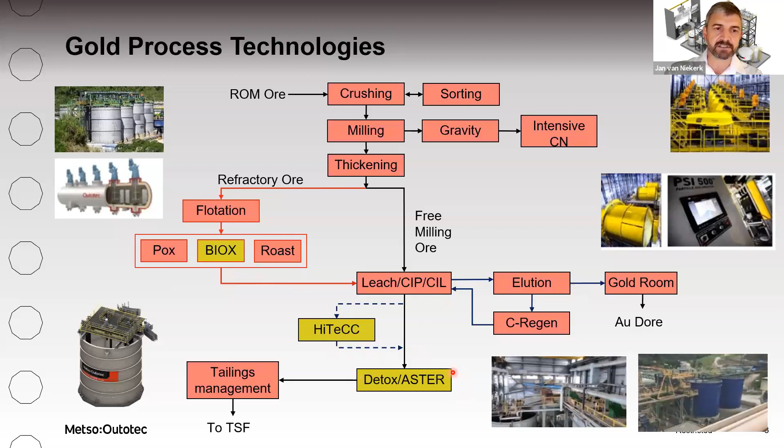Just to put the process into perspective, where it fits into the typical gold flow sheet, this shows the typical steps during the processing of a gold ore. You'll have crushing, milling, and thickening, with or without ore sorting and gravity concentration. After thickening, a free milling ore will go directly to the leaching circuit, followed by gold recovery. But for a refractory ore body, you'll normally have flotation and then an oxidation process, which is typically either pressure oxidation, roasting, or bioxidation, the topic for today's talk. The BIOX product will then go to the standard leaching section for gold recovery. The HiTeCC process we'll discuss later — it's treating the CIL tails to mitigate preg-robbing, and the ASTER process is a detox technology for cyanide destruction.

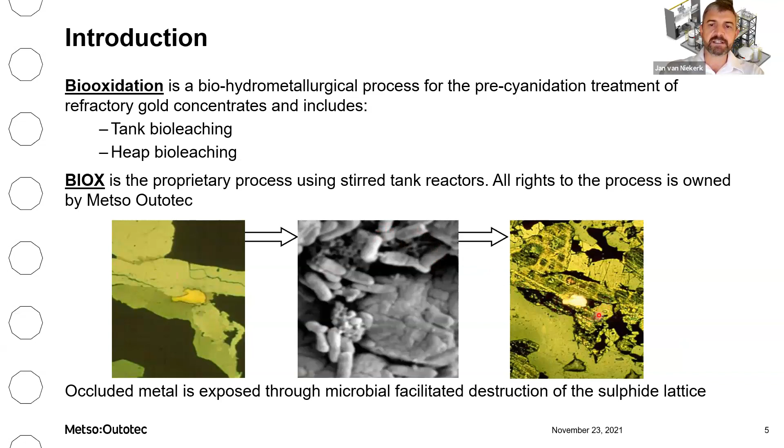Bioxidation is a biohydrometallurgical process for the pre-cyanidation treatment of refractory gold concentrates and includes tank leaching and heap leaching. The BIOX process is the proprietary process using stirred tank reactors, and all rights to this process are owned by Metso Outotec. As you can see in the first picture, the gold particle is totally occluded within the sulphide matrix. The BIOX process is then used to liberate this particle and expose it to cyanide for subsequent gold recovery.

The technology has been commercially available for over 30 years. In that time, we've commissioned 13 BIOX plants in 7 countries, with 1 new plant currently under construction. Total gold production from BIOX over the years has been over 30 million ounces.

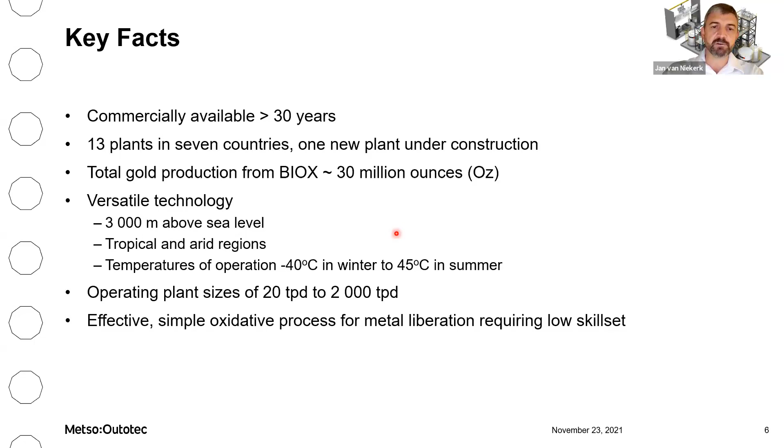It is quite a versatile technology in that it can be used at high altitudes. The highest BIOX plant currently is the Coricancha plant at over 3,000 meters above sea level. It can be used in tropical and arid regions, and it can operate in temperatures from -40 to +45. Operating plant sizes range from 20 ton per day up to 2,000 ton per day. And it's really a simple and effective oxidation process for metal liberation, requiring a relatively low skill set.

This shows the typical flow sheet for the BIOX process. The heart of the process is the BIOX reactors. We normally use a 3-3 or 4-4 configuration, meaning you've got 4 primary reactors in parallel, overflowing into 4 secondary reactors in series. Typical retention time in the BIOX process is between 4 and 6 days.

Nutrients in the form of a fertilizer type, nitrogen, potassium, and phosphorus is added to the feed to the BIOX process, as well as dilution water to feed the process at 20% solids. The important engineering requirements during the BIOX process is the cooling of the process, and we do this using internal cooling coils as well as evaporative cooling towers, and the supply of low pressure air to supply oxygen for the oxidation process. The process will normally operate at 40 degrees Celsius.

The materials of construction for the BIOX reactors is typically stainless steel, although mild steel rubber-lined reactors can also be used.

During the BIOX process, the iron, sulfur, and arsenic is solubilized during the oxidation of the sulphide minerals. So following BIOX, a 3-stage CCD circuit is used to wash the BIOX product and ensure that you've got a clean oxidized solid slurry that is then fed to a standard CIL circuit.

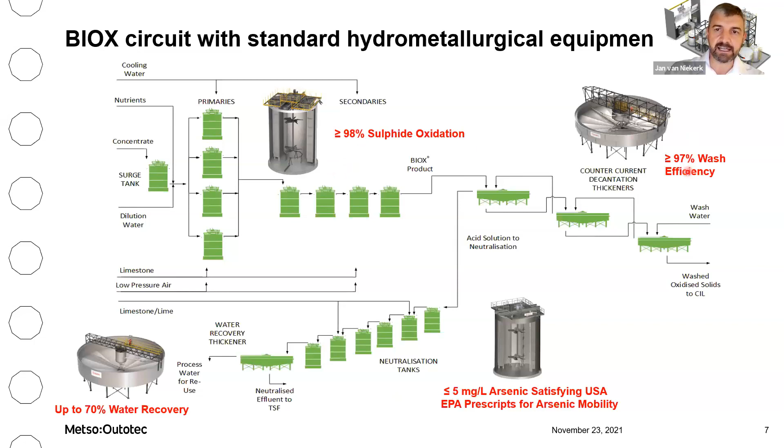The dissolved iron, arsenic, and sulfur that is now in an acidic solution is neutralized in a 2-stage process using limestone and lime to produce stable ferric arsenate precipitates that can be deposited onto a tailings dam. As you can see, the process is simple and uses standard equipment, atmospheric reactors and thickeners for the process.

The 3 important oxidation reactions for pyrite, arsenopyrite, and pyrrhotite is shown here. Important to note is the high oxygen demand during the oxidation of sulphide minerals. It's also important to note that pyrite oxidation produces acid, while arsenopyrite and pyrrhotite oxidation consumes acid.

And this, along with the carbonate content in the concentrate, will determine whether the process is net acid consuming or net acid producing during bioxidation.

This picture at the bottom shows the typical leaching mechanism during bioxidation. The bacteria do not actually oxidize the metal sulfide directly, but the bacteria will just regenerate the ferric that is the oxidant for the leaching of the metal sulfide. You'll typically have two types of bacteria in your tank, your iron oxidizers and your sulfur oxidizers.

Elemental sulfur is oxidized all the way to sulfate. It is important to note that you will always also need a small amount of carbon in the form of CO2 for biomass production during bioxidation. This is normally supplied through the solution of carbonate minerals in the concentrate.

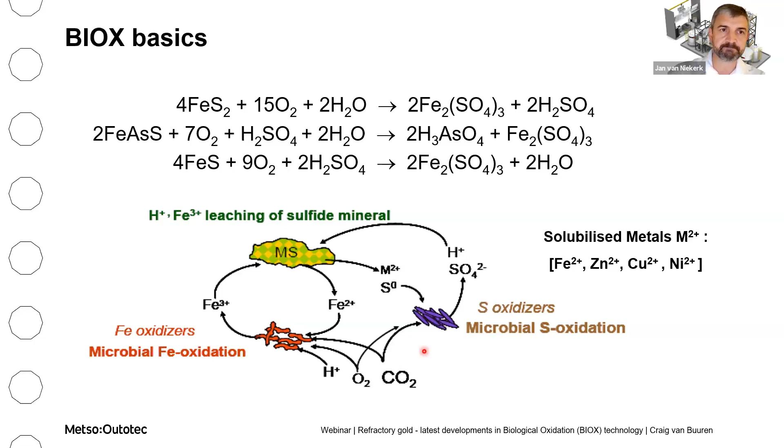Other important reactions during bioxidation is ferrous and elemental sulfur oxidation. Ferrous is for the regeneration of the ferric, that's the oxidizing agent, and elemental sulfur to produce sulfuric acid. As you can see, the reactions for the oxidation of copper sulfide minerals is fairly similar to the standard pyrite and arsenopyrite. And that's why the process can also be used for copper sulfide oxidation.

There's a few general precipitation reactions that will also take place either in the BIOX reactors or following BIOX during the neutralization step. The most important one being the precipitation of arsenic in the form of ferric arsenate, as well as the precipitation of iron and the remaining sulfates as the basic metal sulfate and gypsum.

The most important process requirements during bioxidation is to maintain a steady temperature in the BIOX process, to control the pH, and to ensure a steady oxygen supply for the oxidation reactions. The BIOX bacteria can operate in a range of 30 to 45 degrees. However, we normally control the process within a very narrow range of 40 to 42 degrees.

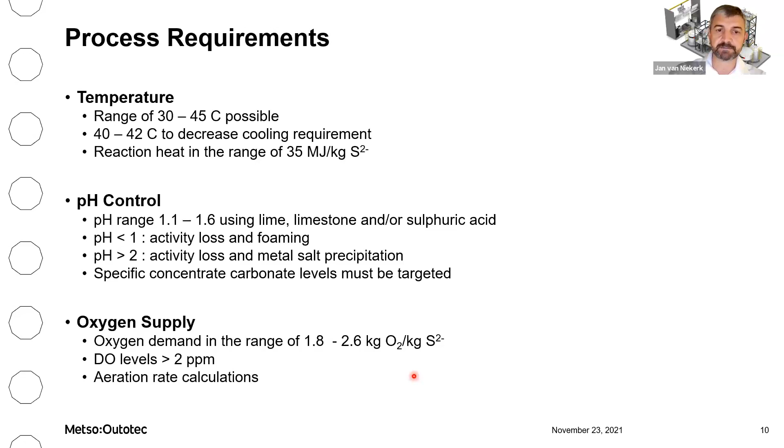Another important aspect of bioxidation is the fixation of arsenic following bioxidation to ensure that they have environmentally compliant products. We use a two-stage neutralization process using limestone and lime to produce ferric arsenate as the arsenic precipitate. This has been shown to be a stable form of arsenic and conforms to the US EPA standards for the disposal of arsenic-bearing material.

Typical results from neutralization tests during bioxidation is shown in the table, and as you can see, the solution concentration of both iron and arsenic following neutralization is well below the standard, as well as the TCLP, or toxicity characteristic leaching procedure extract, following treatment of the precipitate.

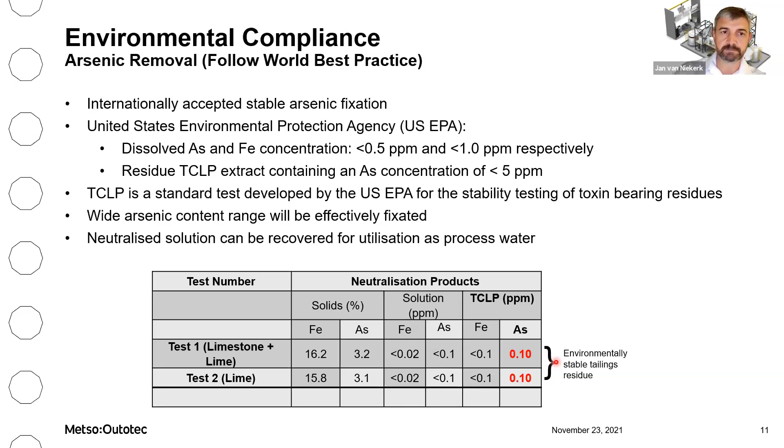The BIOX culture consists of a mixed population of a large number of microorganisms. These are all naturally occurring bacteria and can be found anywhere where you have acid mine drainage. We have just taken those bacteria and trained them up a bit to be able to operate at higher solids concentrations as well as higher temperatures, giving you faster reaction kinetics. We do not actually control the population of the bacteria, but we allow it to reach its natural equilibrium, and the dominant species will be determined by the process conditions as well as the concentrate characteristics.

Interesting to note the concentration of bacterial cells per milliliter, and for a healthy population, the concentrations will be in the order of 10 to the 8 cells per milliliter. The bacteria are present as both free-floating as well as attached to the sulphides in the slurry.

It's important also to note that the bacteria are non-pathogenic, and therefore it does not pose a risk to humans or animals. But it must be noted that the slurry itself contains dissolved iron, arsenic, and sulfur at a very low pH, so the slurry itself is toxic for humans.

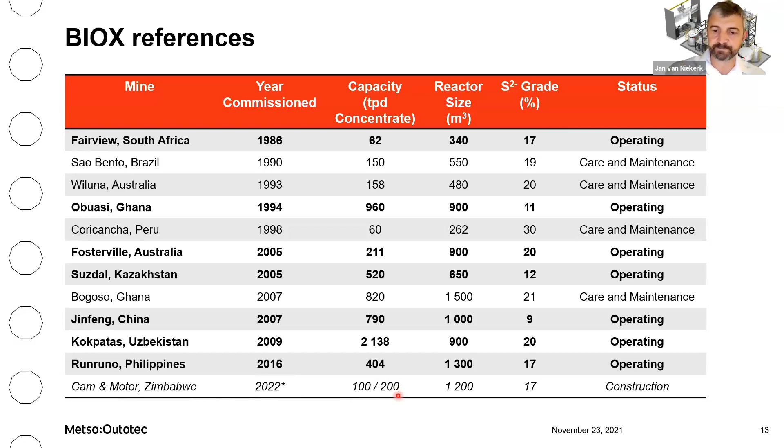As I said, the technology was initially developed at the Fairview BIOX plant in South Africa. This was an old Edwards roaster that needed to be replaced, and the mine was owned by the Gencor company in South Africa at the time. They evaluated quite a few different technologies at the time, and finally decided to develop the BIOX process due to the lower capital cost associated with the process. They didn't want to use roasting again due to the presence of arsenic in the concentrate, and the plant was too small for an autoclave.

The plant is still in operation today, and gold recoveries on this plant typically is in the order of 98 to 99% following bioxidation.

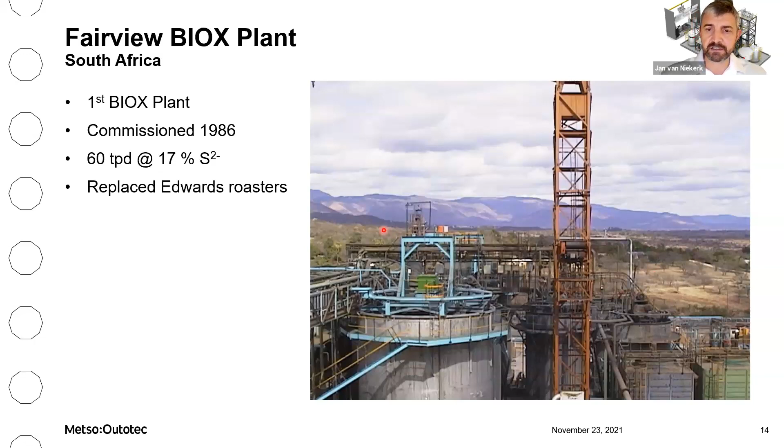As I said, the largest BIOX plant in operation is the Kokpatas plant in Uzbekistan. The first phase was commissioned in 2009 and the second phase in 2011. The plant demonstrates the ability to increase the capacity through the use of modules. The plant consists of 4 modules of 6 reactors per phase.

The Kokpatas plant will also see temperatures of plus 50 in the summertime and needs to operate at minus 20 degrees during wintertime.

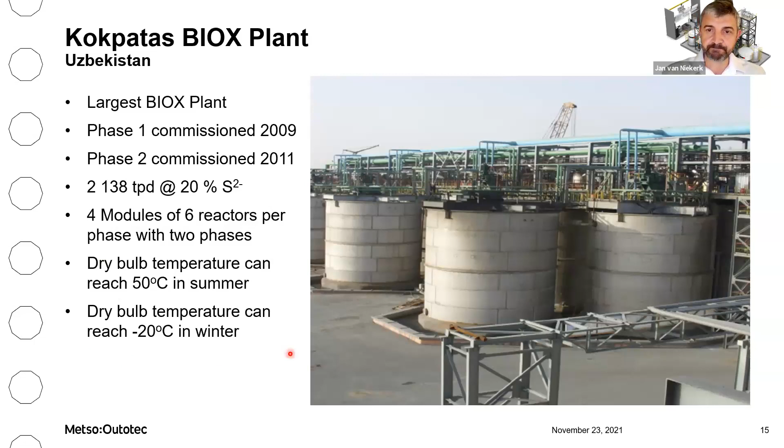The first application of the BIOX technology in really sub-zero conditions was the Suzdal plant in Kazakhstan. The plant was commissioned in 2005 with a capacity of 160 tonnes per day of concentrate and expanded in 2010 to the current capacity of 520 tonnes per day. Being in northern Kazakhstan, the plant sees -45 ambient temperatures for extended periods during winter.

On the photograph, you can see the first phase or the first BIOX expansion on the right and the second phase on the left. As you can see, the BIOX reactors are actually outside the building with the rest of the plant located inside. There are only covered walkways on top of the reactors for running the piping, as well as to protect the operators from the extreme climates during winter.

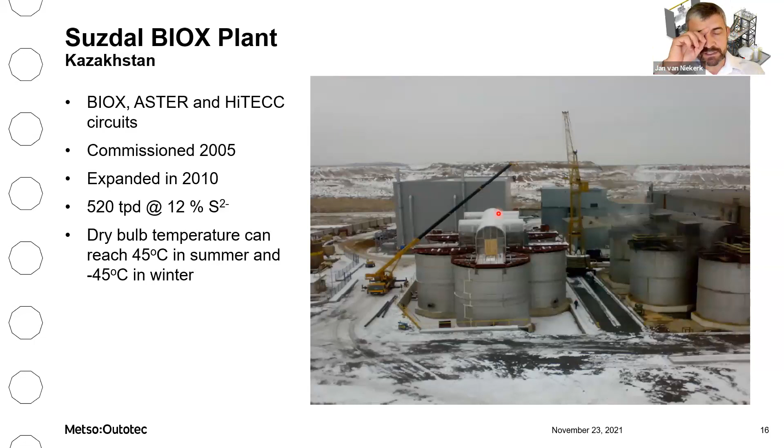This shows a schematic diagram of the first phase at the Suzdal BIOX plant. Again, as I indicated, the rest of the plant is located inside the building. Here showing the BIOX CCD, neutralization and water recovery thickener. The flotation is on one side of the BIOX section and the CIL section on the other side, with the BIOX reactors outside the building with just a covered walkway.

Also shown here are the BIOX blowers as well as the cooling towers. It's interesting to note that even during the coldest periods during winter with -45 ambient temperatures, you still need to cool the BIOX primary reactors, and the cooling towers are in operation throughout winter.

However, designing the plant under these conditions is more difficult than a normal plant, and you need to take into consideration maintenance schedules and standby power procedures should there be a power failure during the winter.

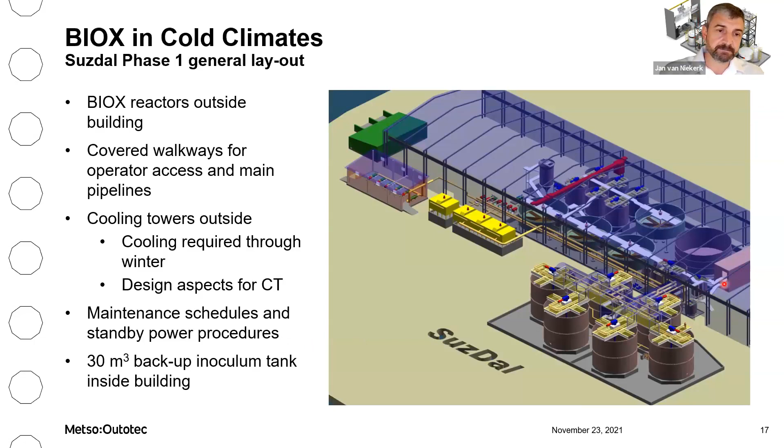The Fosterville plant in Australia was commissioned in 2005 with a design capacity of 211 tonnes per day of concentrate at 20% sulfur.

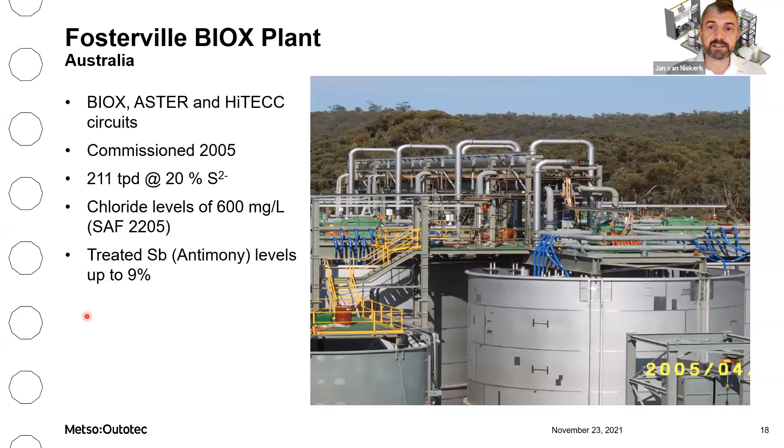It's interesting to note that this plant sees elevated chloride levels in the processed water and had to be constructed from duplex stainless steel for that reason. The plant also sees elevated antimony levels in the concentrate. Normal operating levels range between 3 and 5% antimony, but they can see up to 9% in the concentrate without affecting the BIOX performance.

The Coricancha plant in Peru was commissioned in 1998, but unfortunately only operated for a couple of years and is currently in care and maintenance. But the important aspects of the plant are that it operated at arsenic levels in the concentrate feed of up to 20%, and the plant is also located at 3,000 meters above sea level.

Now again, bacteria does not really see the altitude or the external environment, but the high altitude does make the design of the aeration circuit more complex.

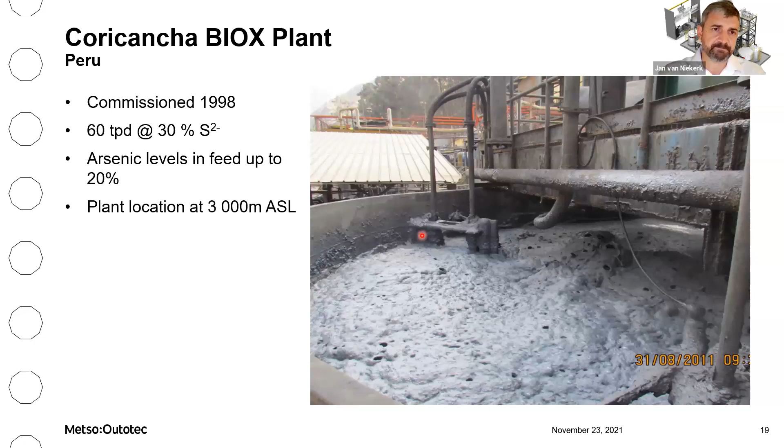The Runruno plant in the Philippines was commissioned in 2016. Again, the design of the cooling circuit for this plant was very important due to high humidity and high wet bulb temperatures experienced in the Philippines. The plant also includes our latest generation 4 BIOX agitators, which are the higher efficiency agitators recently developed.

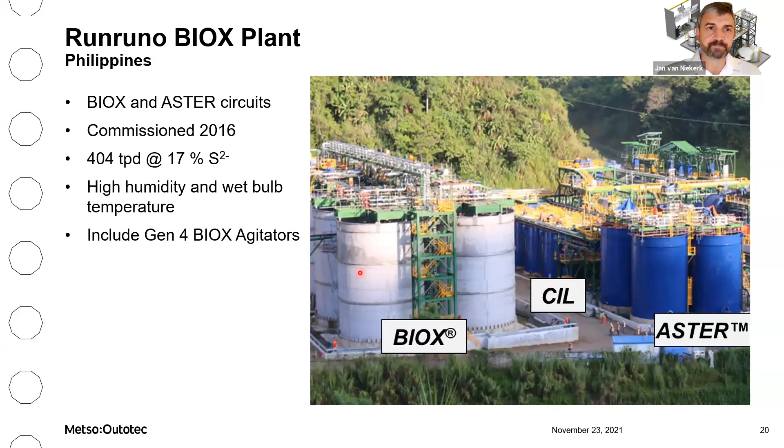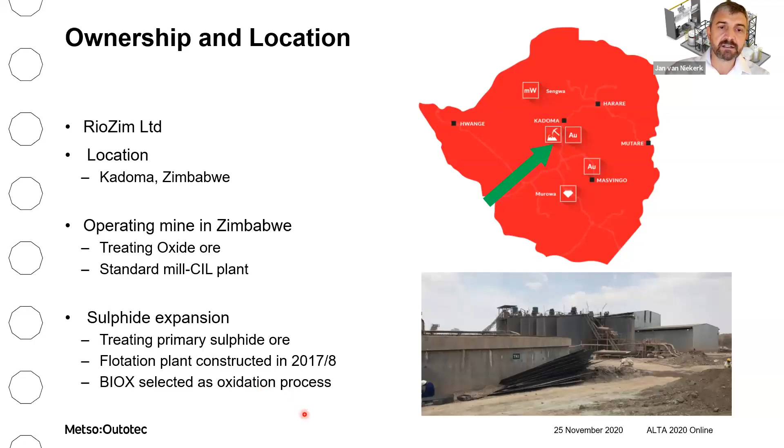The newest BIOX plant currently under construction is located in Zimbabwe near the town of Kadoma. It's an operating mine treating an oxide ore through a standard mill and CIL plant. However, they are running out of the oxide material and therefore decided to expand the plant to include a sulphide treatment plant, with BIOX selected as the oxidation process.

The phase 1 plant will have a design capacity of 100 tonnes per day at 20% sulfur. However, when we did the design, we already designed the plant for the full capacity of 200 tonnes per day, with only part of the plant installed during phase 1. So for phase 1, we will install only 3 of the 6 BIOX reactors, 2 of the CCD thickeners, and 3 of the neutralization tanks, as well as the associated services and reagent makeup. This will give us sufficient capacity for the phase 1 operation.

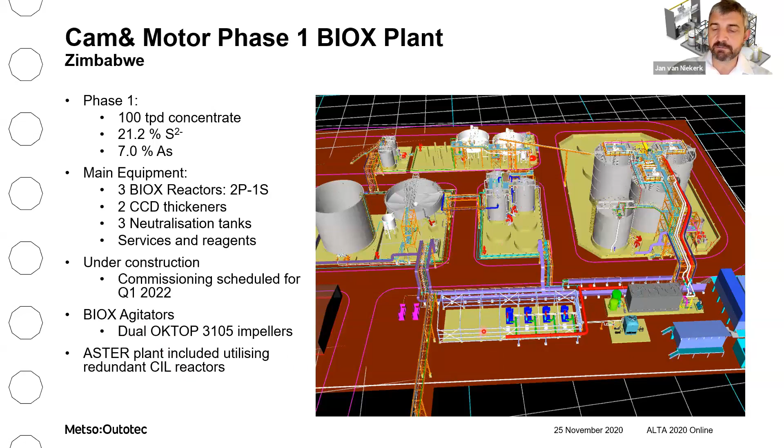Phase 1 is currently under construction and commissioning is scheduled for early next year. The plant will also include an ASTER plant using some redundant equipment for thiocyanate destruction.

Phase 2 will then expand the capacity to 200 tonnes per day of concentrate with the addition of 3 additional BIOX reactors, 1 additional CCD thickener, and 3 neutralization tanks. Additional blower and cooling capacity will also be added as part of the expansion.

Here you can see a fairly recent photograph of the construction site showing the 3 BIOX tanks with the BIOX stock tank, the 2 CCD thickeners and the 3 neutralization tanks, as well as some water tanks and the tailings thickener.

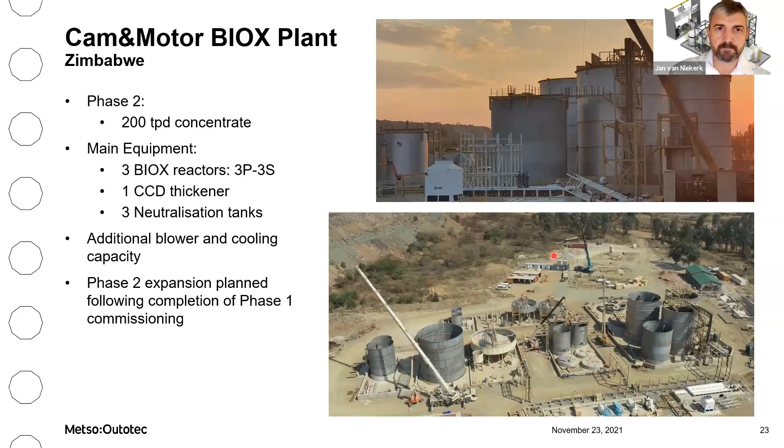This is just a photograph showing the inside of the BIOX tanks, showing the BIOX agitators, which is the Metso Outotec OKTOP 3105 agitator, as well as the cooling coils used for cooling in the BIOX tanks and the sparge ring.

This photograph just shows the BIOX bacterial inoculum. We have already started the inoculum build-up process in anticipation of the commissioning of the plant early next year. So the inoculum is already on site and active.

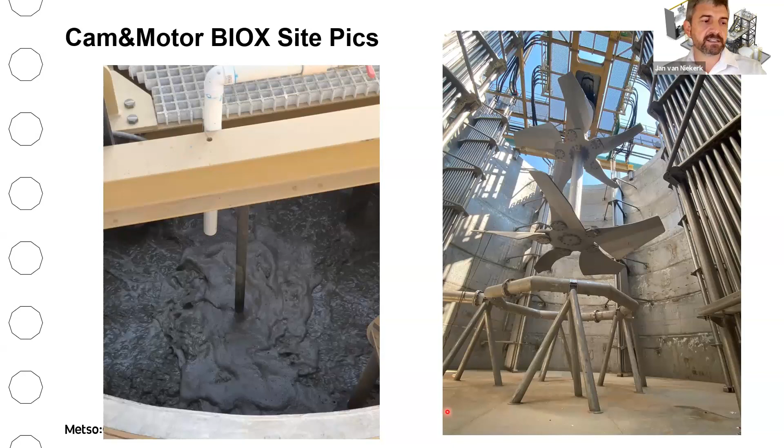Just to give a bit of detail of the typical inoculum build-up process during the commissioning of a BIOX plant: we will typically take 10 liters of bacterial culture already adapted to the specific concentrate to site, and then use a number of reactors to step up or increase the volume of this inoculum to the point where you can commission the first BIOX primary tank.

We will normally use a 10, 100 and 1000 liter laboratory reactor, followed by the nutrient makeup tank, as well as the neutralization tank that will be temporarily converted into BIOX tanks to increase the volume until you are ready to go into the primary tank.

This process will typically be started in order of 4 months before you want to commission the first primary tank. And this time will also be used to train the operators to control the process.

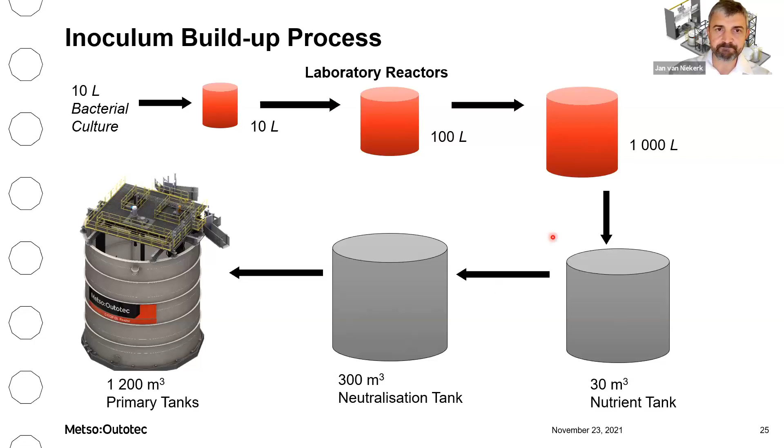Now this slide shows the typical steps a BIOX project will go through during development of the project. The first stage of test is called batch amenability test, and it's a series of batch BIOX tests on a concentrate sample. The tests are then stopped after different times to give the oxidation profile as well as the correlation between sulfide oxidation and gold recovery.

The test normally takes about 3 to 4 months to complete and can be completed either at SGS in Canada, SGS South Africa, or ALS in Perth.

Usually, in conjunction with or just following batch amenability tests is a pre-feasibility study to determine the capital and operating costs associated with the BIOX project. This normally takes about 2 months to complete and can be done either in-house by Metso Outotec or with an engineering company. If BIOX is then selected as the preferred oxidation process for the project, we will conduct a continuous BIOX pilot plant run.

This is normally done either at a commercial laboratory again, as well as at the actual mine site. We've got 2 standard pilot plant sizes, requiring about 150 or 650 kilograms of concentrate. Both plants will give exactly the same results. It will just depend on the amount of concentrate that is available for test work.

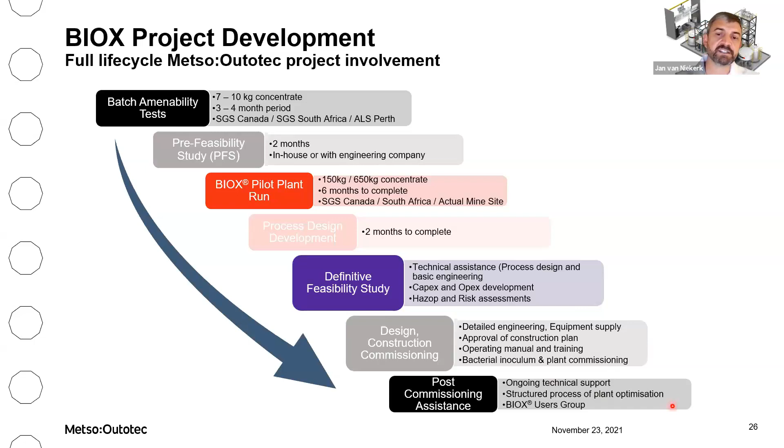The batch amenability test program will give you typically sufficient information for the pre-feasibility level study, including the rate and extent of oxidation, the gold to solution as a function of oxidation, your order of magnitude reagent consumptions, and the neutralization performance, confirming that they'll produce stable arsenic precipitates, as well as settling characteristics for thickener design.

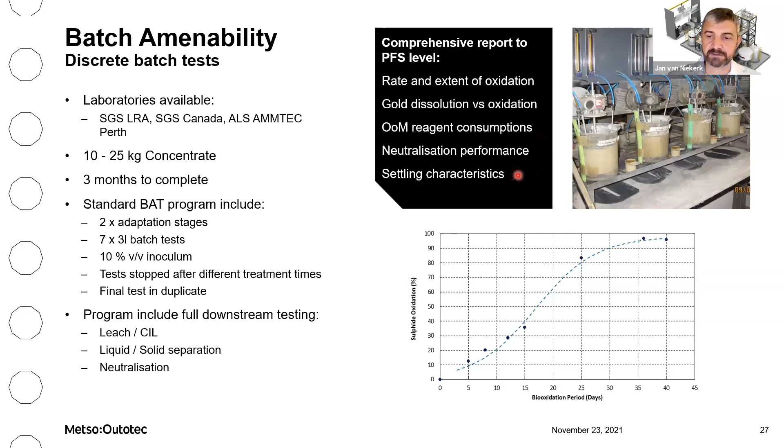The second step is then the continuous pilot plant operation. And this includes the full downstream testing, indicating the leach CIL test work, as well as liquid solid separation, neutralization, and testing the properties of the different process slurries.

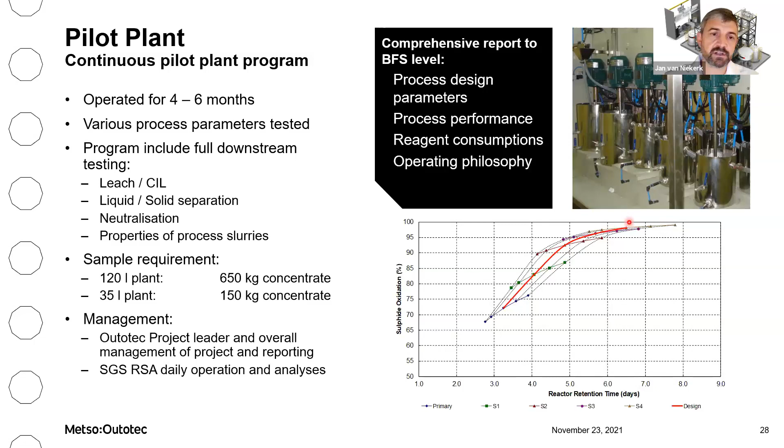The product from the pilot plant is a comprehensive report to BFS level, including the process design parameters, the process performance, reagent consumptions, and importantly, the operating philosophy during the operation of the BIOX plant. This is the important graph that will be generated during a continuous pilot plant.

That will give you the sulphide oxidation as a function of retention time, and this will give you an operating window which we will use to design the commercial plant. Now, looking at the capital cost structure for a typical BIOX plant, you'll see the capital is a strong function of the sulphide oxidation tonnage into the BIOX plant. That is simply because the two main cost drivers for the plant are the supplying of oxygen for the process as well as the removing of heat.

Typically, the BIOX tanks and the BIOX agitators will make up 40 to 60% of the capital cost of a BIOX plant. CCD thickeners will be 10 to 15%, the blowers 10 to 15%, and the cooling towers and cooling water pumps 5 to 10%.

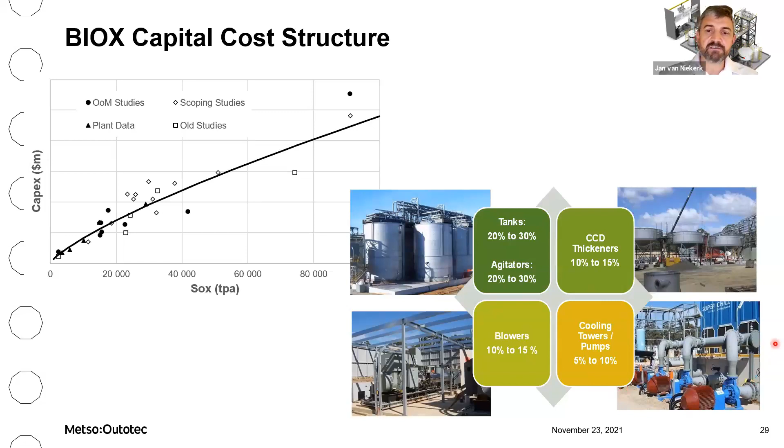The two main operating cost drivers for a BIOX plant are the power as well as the reagent costs, which is again dominated by the limestone and lime for neutralization. We've developed a high-level design program that will indicate reagent and power consumptions even at a very early stage during the development of the project, and that will help us optimize the project and reduce operating costs.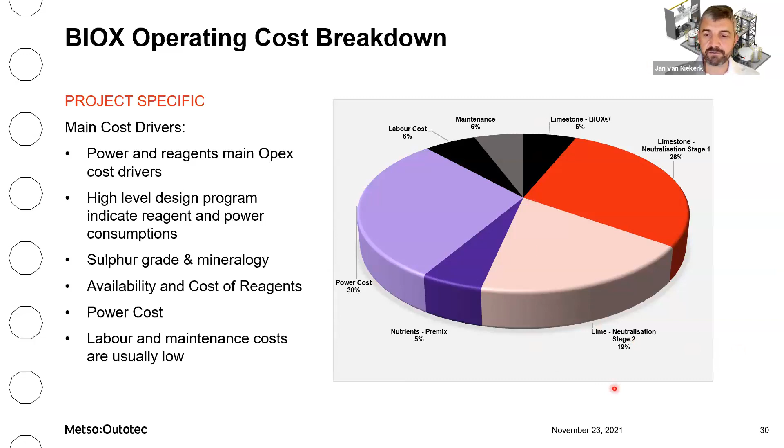Obviously very important is the availability of reagents and the cost of the reagents, as it's a main driver of the overall operating costs.

Now, a little bit about the development of the technology over the years. What we call our Generation 1 and Generation 2 BIOX plants, commissioned between the period of 1986 to 2010, is typified by the traditional or classic BIOX design. During this period, we proved that the BIOX design is sound, and we've got established testing, design and commissioning procedures. However, during this period, we saw that there were still a number of factors affecting the performance of the BIOX process. These included some mechanical failures, especially on the BIOX agitators, some maintenance issues, and some process control issues.

We then decided to launch what's called our BIOX Generation 3 design, and in this design we addressed these factors that affect the performance of the BIOX process. So we increased the robustness of the process through adapting our BIOX design program. We improved our service offering to improve the process control during operation, and improved our knowledge base and the application of this knowledge during commercial operation.

We also attended to some main problem areas, including BIOX frothing, our sparge ring design to prevent blockages of the sparge ring, addressing some CCD1 gold losses, and very importantly, we addressed the agitator failures that we're seeing on some of the plants.

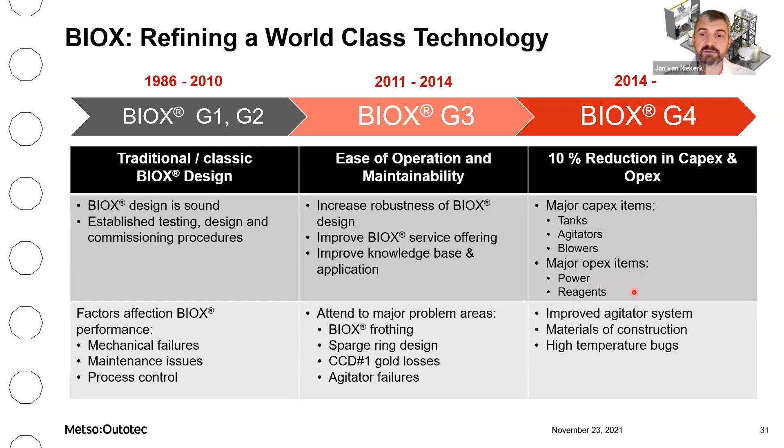In terms of operating cost, that is addressing the power cost as well as reagent costs. This led to the development of the mesotherm circuit. Now what this is, is a combination of our standard BIOX bacteria operating at 40 degrees for the primary oxidation stage, followed by a secondary or high temperature thermophile stage.

to complete the oxidation. The advantage of this process is for the primary stage, we target between 65 and 75% oxidation. The BIOX technology is a very well-known technology. The microorganisms are very robust, and we've got very well-known and defined operating parameters. The secondary oxidation stage or thermophile stage will then give us complete oxidation of the sulphide, any intermediate sulfur species in the BIOX product. You will have lower utility requirements at a higher temperature, but it is a more complex design, especially in terms of materials of construction.

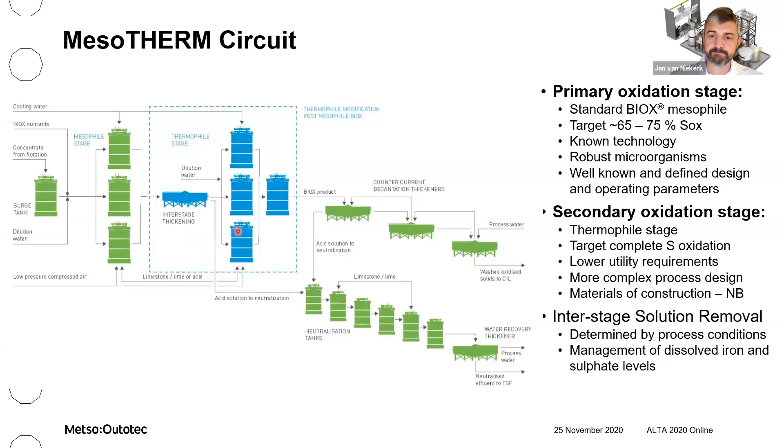We also include an interstage thickening step to manage the dissolved iron and sulfate levels in the feed to the thermophile stage. What we're trying to achieve is to reduce or eliminate any intermediate sulfur species typically found in a mesophile BIOX product. These intermediate or partially oxidized sulfur species can react with cyanide to form thiocyanate and therefore increase overall cyanide consumption.

If we look at a typical Fairview ore sample treated using mesophile and then mesotherm: for the mesophile product to achieve good gold recovery, we required 19 kilogram per ton cyanide addition, with about 92% of the cyanide lost to the formation of thiocyanate, and only a very small amount of cyanide still available for leaching at the end of the test. For the mesotherm product, to achieve the same level of gold recovery, we only needed 8 kilogram per ton of cyanide, with only 22% reporting as thiocyanate, and the bulk still available as free cyanide. This was really developed to address one of the main operating costs for a BIOX plant, being cyanide.

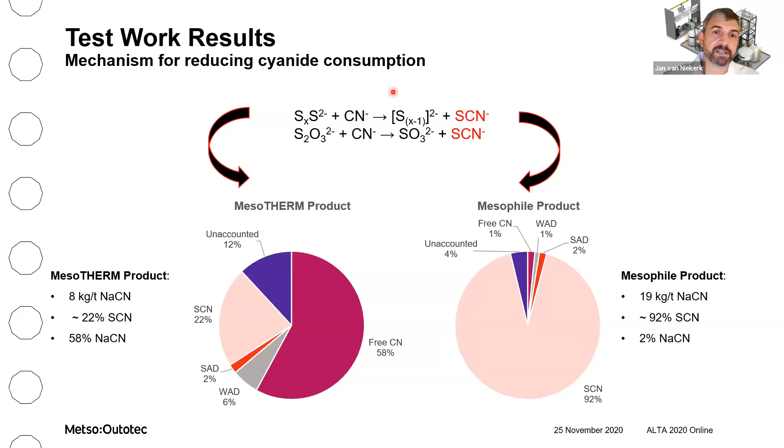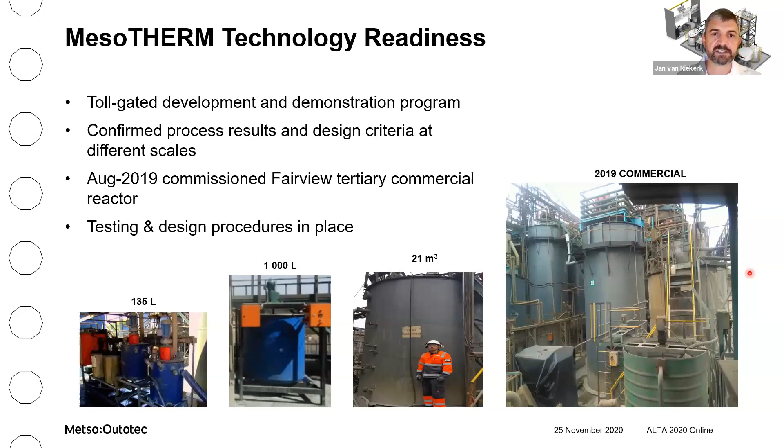The process was developed through a toll-gated program to demonstrate it at various scales, which was used to confirm our testing and design procedures. Some of the stages are shown here: a 135 liter pilot plant and a 1,000 liter pilot plant run at the Fairview Mine in South Africa, followed by a 21 cubic meter demonstration tank. In 2019, we commissioned the first commercial reactor, one of the Fairview secondary reactors converted into a thermophile, now called a tertiary reactor. This toll-gated process confirmed the results of the process at different sizes and confirmed our design procedures.

Okay Ken, maybe it's a good time now to take a few questions before we go into base metal sulfide bioxidation.

Jim, are there any questions yet? I don't see any questions. I actually have a couple questions.

It sounds from what you were describing that the pyrite concentration in the ore is very important, that it determines if the ore is acid producing or acid consuming in the BIOX process. Is there a key concentration of pyrite in the ore where you move from this acid producing to acid consuming regime?

Yeah Ken, you'll have to determine that for every concentrate. As I said, it's both the sulfur mineralogy as well as the carbonate concentration that will determine whether the concentrate is acid producing or acid consuming. Normally you don't really have much control over that in the process, because you have to use the concentrate that you're given. But we do see that most concentrates are acid producing, so requiring lime or limestone to neutralize or maintain the pH.

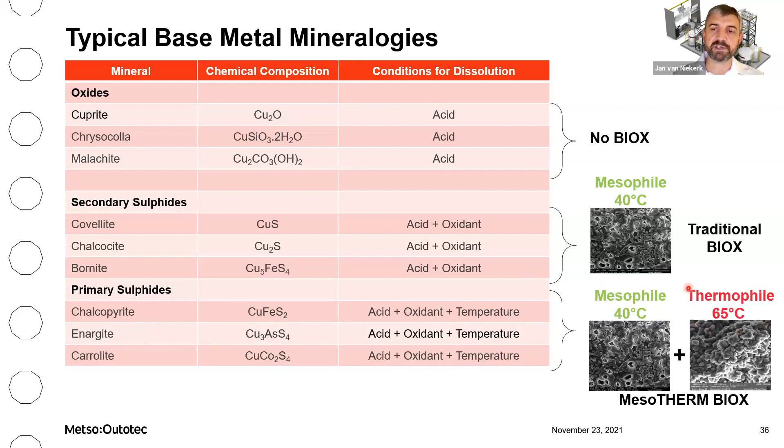If you look at some published bioleaching results, this is for mesophile oxidation, and as you can see, for your secondary coppers, you can get very high copper dissolution, but for your primary sulfide minerals, the oxidations are much lower.

However, if we use the mesotherm process, and this is some results from test work we've done on different concentrate samples with varying mineralogies, you can see at the higher temperatures you can get back to very high copper dissolutions.

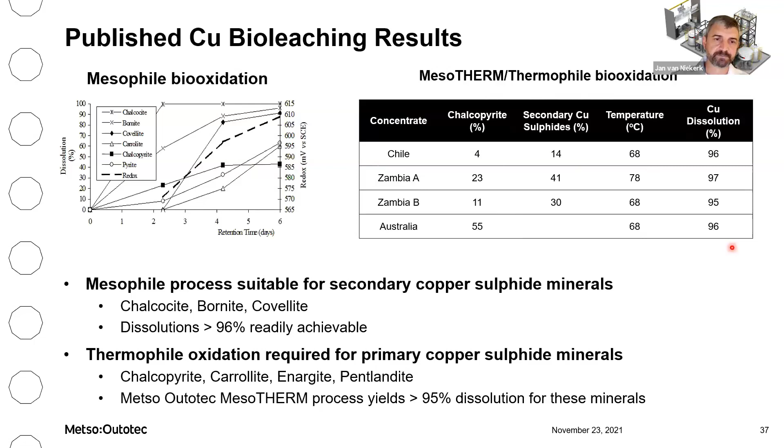Now, the bioxidation of base metal sulphides is certainly not a new technology or new process. The first example on commercial scale was the Kasese Cobalt Company in Uganda that used it to treat cobalt ferrous pyrite concentrate. This plant operated for a number of years very successfully.

And then Alliance Copper, the BHP Codelco joint venture, also demonstrated the use of thermophile bacteria for treating enargite chalcopyrite concentrate at 75 degrees C. This was done at the Chuquicamata mine in Chile. So it's certainly not new technology. It's, I think, relatively well proven in the industry, but just hasn't found that wide application yet.

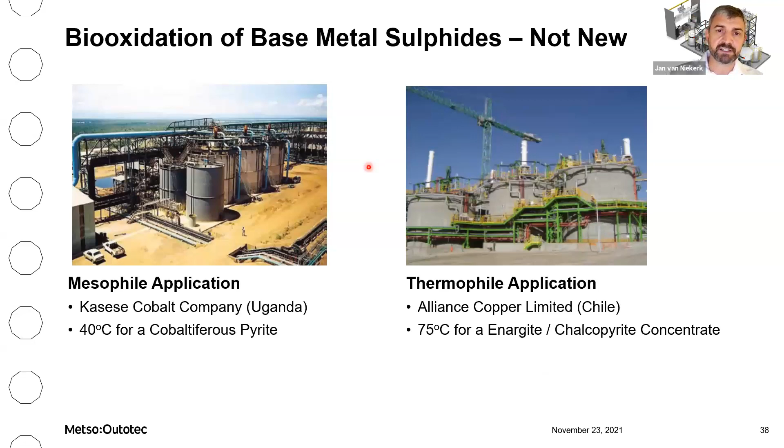As part of the development of the base metal bioxidation, we had to really look at the flow sheet development. For gold bioxidation, the flow sheet is fairly simple, but for base metals it's a lot more complex because you have to look at the recycling of raffinate after copper SXEW, and you also need to look at managing solution concentrations and your solution chemistry throughout the process.

So we've developed a number of HSC chemistry software models to assist us to model this process. The objective is really to maximize the overall metal dissolution, to minimize reagent consumption, and it's important to try and maintain as simple a process flow sheet as we can. But having said that, also to maintain versatility, because as you know, no concentrate stays exactly constant during operation, and you need to be able to adapt the process to cater for variations in the feed concentrate.

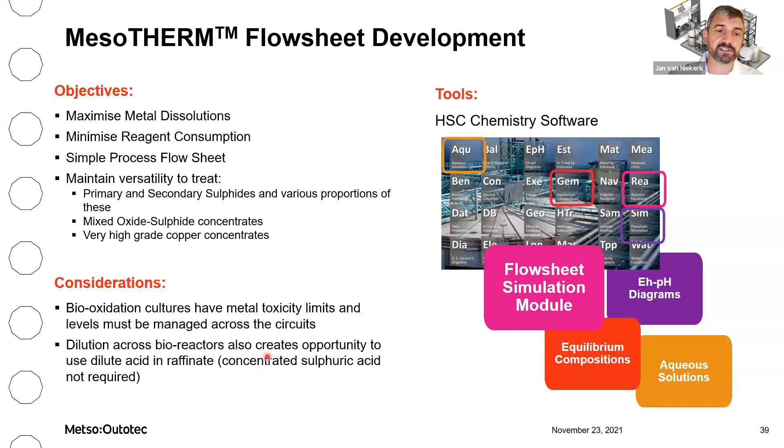Some of the considerations that need to be taken into account is the BIOX cultures do have metal toxicity limits, and these must be managed across the circuit. You also look to use the dilute acid in the raffinate across the BIOX reactors to reduce the overall acid requirement if needed.

This is just an example of the typical flow sheet that we've developed for one of the projects, and it shows the complexity of the circuit. This is a copper gold ore, a copper gold concentrate, and it's also a concentrate containing primary copper minerals, meaning that we use our mesotherm process.

What you can see here is the mesophile circuit, typical mesophile reactors, followed by the thermophile circuit with solution removal in between to manage your solution chemistry. Following oxidation, you've got your standard CCD circuit with the solids going into your CIL section, followed by detox and tailings management.

And then your acidic solution from your CCDs is combined with the interstage solution, as well as any other raffinate recycles, and that is then directed to the SXEW circuit to recover the copper, with raffinate again recycled either to your thermophile or your mesophile circuit, or even if you've got an acid pre-leach, it can be used there as well.

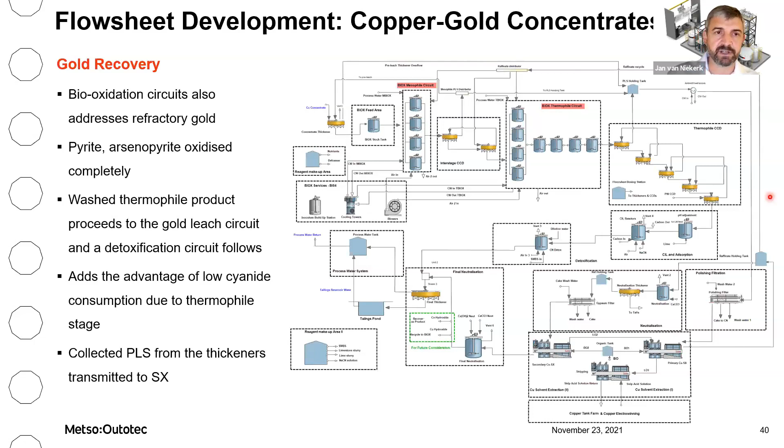So yeah, the circuit for copper does become a lot more complex, but we can model it very efficiently using HSC chemistry. These are just a few photographs of a test program we did for a client of ours. They asked us to test their concentrate for copper recovery, but they also asked us during the process to actually produce a small copper cathode.

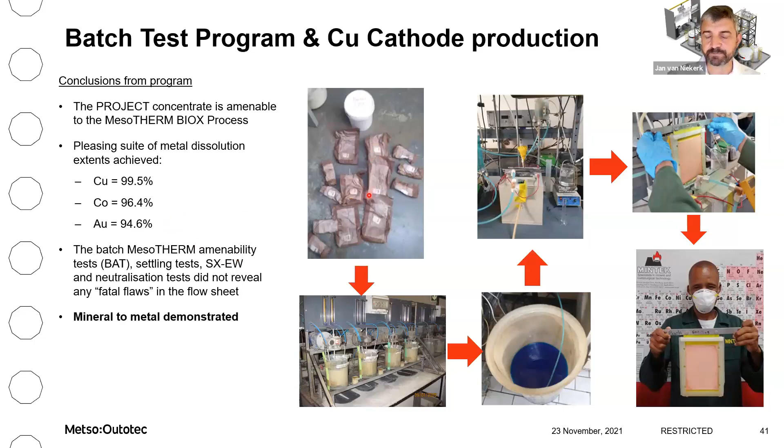We followed the process and did each step of the process. Some of the results were very pleasing. We achieved a copper dissolution of 99.5%, cobalt of 96%, and gold of just under 95%. So it really demonstrated the process, and it showed that there's no real fatal flaws in the process. Yeah, a really, really nice set of results.

The next process I'd quickly like to touch on is the HiTeCC process. Like I said, this is a chemical process, not a biological process, for the treatment of CIL tailings to recover preg-robbed gold. In this process, we basically utilize temperature and solution chemistry, through the addition of caustic, to dissolve gold from preg-robbed carbon in the ore.

And this dissolved gold is then captured on fresh activated carbon. The process has been trialed, implemented, and is successfully being operated on 2 sites. Metso Outotec acquired the technology actually from Kirkland Lake that developed the process for the Fosterville Mine in Australia.

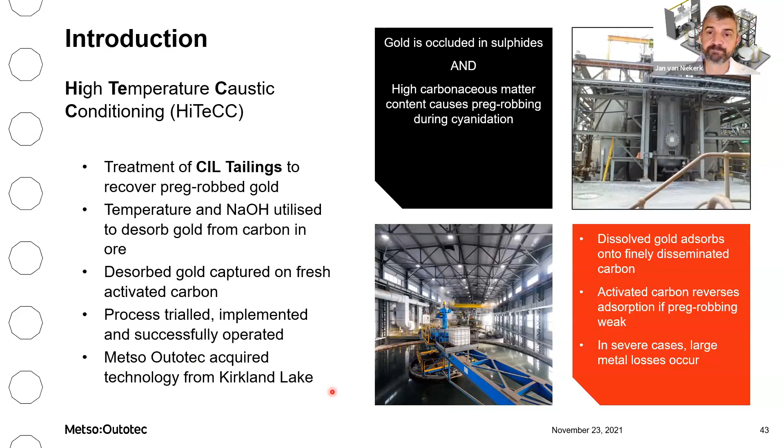Just to show the flow sheet briefly, you will treat your standard CIL tails firstly in a desorption stage, normally consisting of 3 tanks. This is where the temperature is increased and sodium hydroxide is added to dissolve the gold that was adsorbed onto the natural carbon and put it back in solution.

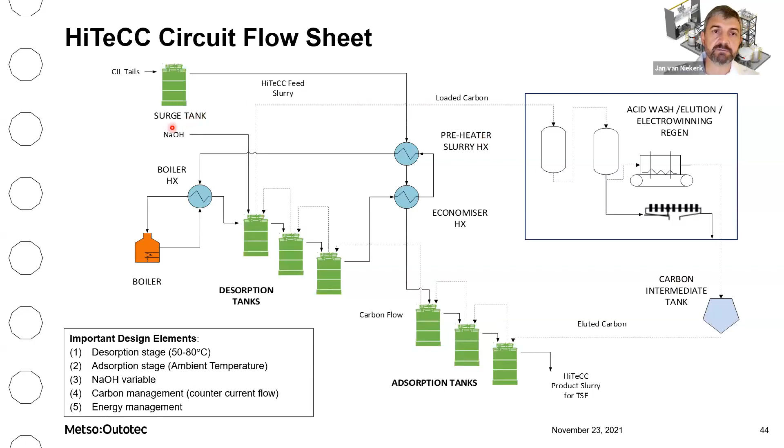The desorption stage is then followed by an adsorption stage where the temperature is lowered again and fresh activated carbon is added to the circuit to adsorb this dissolved or redissolved gold and make it available for recovery again. An important part of the design of the process is the energy management to manage the operating cost for the process.

To test a new concentrate, we typically use small scale, that's 2 to 5 liter laboratory tests. These can be done in any commercial laboratory, or it can also be done at the mine site, like we've done for the Kazakhstan and Australian projects. The preg-robbing sample is subject to different temperatures, and the gold desorption is then tracked at the different temperatures.

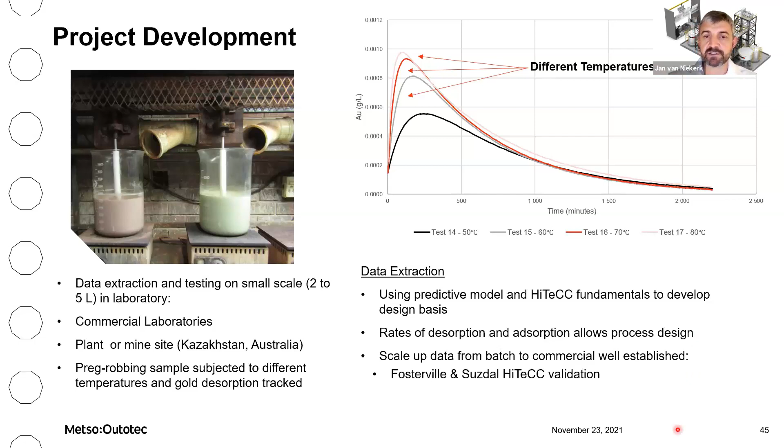We've then used a predictive model that we've developed, as well as HiTeCC fundamentals, to develop the design basis for the commercial plant. Rates of desorption and adsorption are determined during the test work, which allows us to do the process design. The scale-up from batch to commercial scale is now well established based on the Fosterville and Suzdal HiTeCC validation.

The process was developed by the Fosterville mine in Australia. They implemented their first plant in 2010, and the plant treats a combination of fresh CIL tails as well as old tailings recovered from the tailings storage facility. Fosterville experienced quite severe preg robbing based on some black shale material in their concentrate. They evaluated all the standard processes to try and mitigate this preg robbing, including blinding agents, as well as trying to remove the organic carbon before treatment using flotation or gravity, but nothing really addressed the situation or it was associated with too high gold losses.

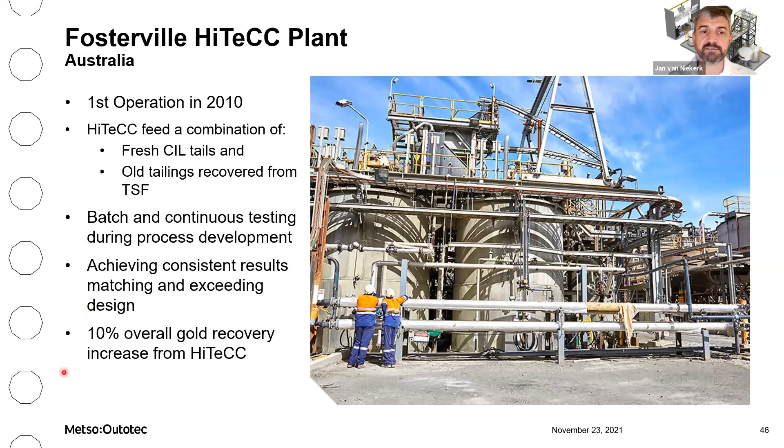So then they decided to develop the process themselves, following quite an extensive process of batch and continuous testing. The process is achieving very consistent results, matching or exceeding their design, and they get a 10% increase in overall gold recovery from the HiTeCC process.

The second installation was in the Suzdal plant in Kazakhstan. They decided to install the process after a structured program of batch work done on site, backed by a feasibility study. The plant was commissioned in 2016 and again treats a combination of fresh CIL tails as well as old tailings recovered from the tailings storage facility. They see an increase of between 6 and 8% overall gold recovery due to the addition of the HiTeCC process to their circuit.

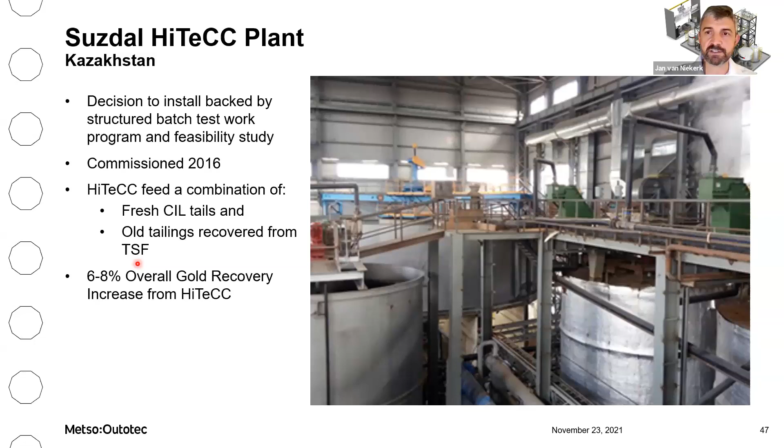The last process I'd like to briefly touch on is our Aster process. Aster is a biological process for thiocyanate destruction in either a solution or a slurry. It's a low capital and operating cost process, and we had to develop it because of the increasingly stringent requirements for disposal of cyanide, specifically thiocyanate, and the water management requirements around the BIOX plant. Standard cyanide destruction is relatively easy using chemicals, but thiocyanate destruction chemically is very expensive and often not that easy. BIOX bacteria are very sensitive to any cyanides, including thiocyanates, in the water. So in order for our BIOX lines to be able to close their water circuit, we had to develop a process that can address the thiocyanate.

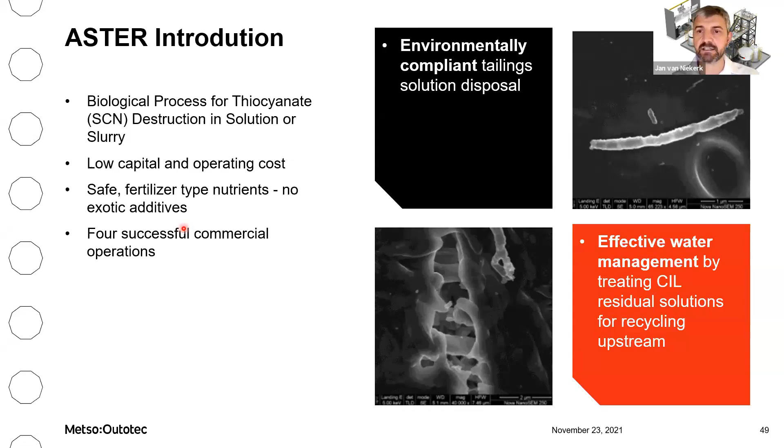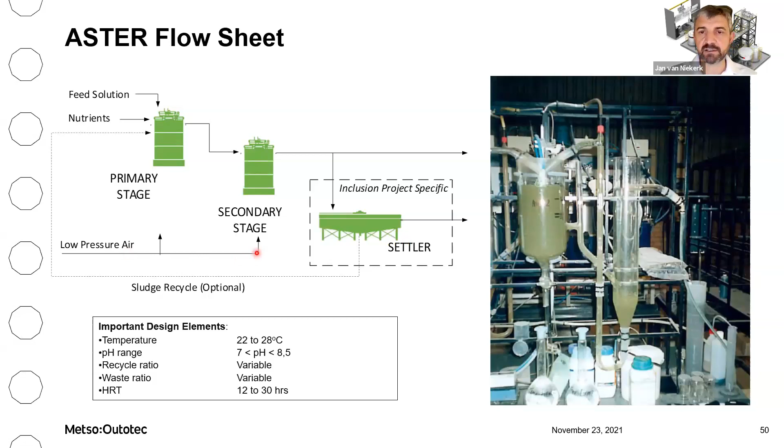The process is fairly simple. It normally consists of one or two stages of Aster tanks, followed by a settler if required by the process. Typical operating conditions are somewhere between 22 and 28 degrees Celsius, neutral or slightly alkaline conditions, and hydraulic retention times of between 12 and 30 hours. Mild agitation is normally included in the reactors themselves, and a low volume of low pressure air is added just to maintain oxidizing conditions in the Aster tanks.

The first commercialization of the technology was at the Consort plant in South Africa. This is one of the plants that produces the concentrate treated at the Fairview BIOX plant, and therefore no cyanide or thiocyanate can be tolerated in the process water for the Consort plant. So the Aster was installed to treat tailings dam solution and allow recycling of this solution upstream to the flotation section. It's a relatively small plant, treating only about 320 cubic meters per day of solution at relatively low feed thiocyanate concentrations, but achieving very good results. It really showed the simplicity of the process - these are just plastic water tanks, JoJo tanks, fitted with a sparge ring at the bottom, and overflow and feed pipes. That is really the Aster process or Aster tanks for the Consort plant.

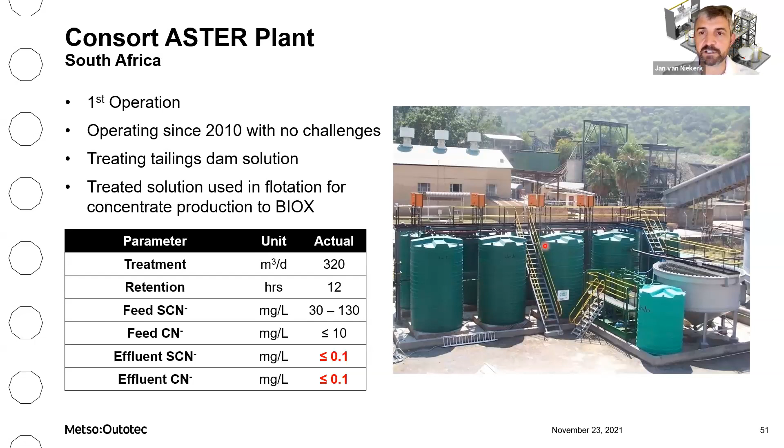The second installation was the Suzdal Aster plant in Kazakhstan, where they retrofitted current redundant tanks in the plant and repurposed them to be used as Aster tanks. They have treated thiocyanate concentrations as high as 3,500 ppm, and again the solution from the Aster is recycled upstream of the BIOX. Typical operating results are shown in the table, and as you can see, the actual thiocyanate feed, which is the average of the operation to date, is in the order of 2,400 ppm, and the result in the Aster product is less than 1 ppm thiocyanate.

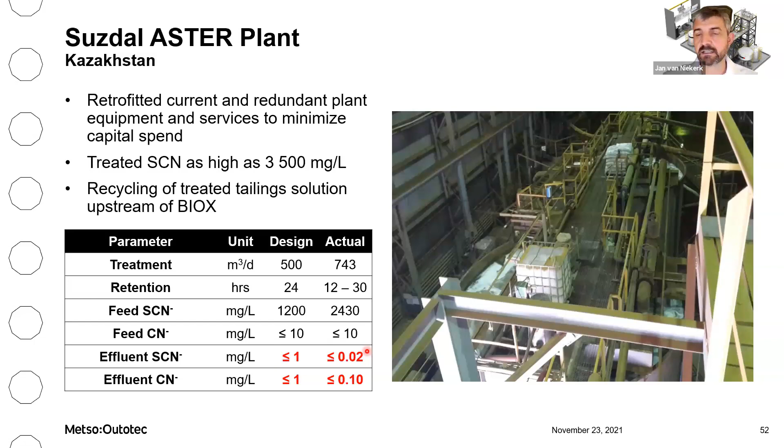The third application was the Runruno plant in the Philippines, and this is by far the largest aster plant to date. This is also the first plant where we had to treat a dilute slurry, because of the requirement for Runruno to detoxify the solution prior to discharge onto the tailings dam.

But again, achieving very consistent results. And this water is again then pumped up to the tailing storage facility, and overflow water is returned to the process.

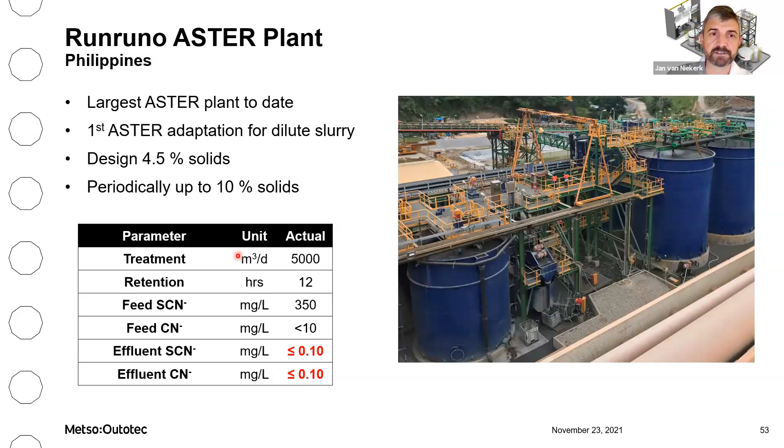And the latest aster plant is the Fosterville plant in Australia. Here the aster really enables reuse of the detoxified solution, again in the BIOX circuit, and they treat the highest thiocyanate feed levels to date. They see up to 5,000 ppm thiocyanate in their feed, and the target is to achieve below 1 ppm.

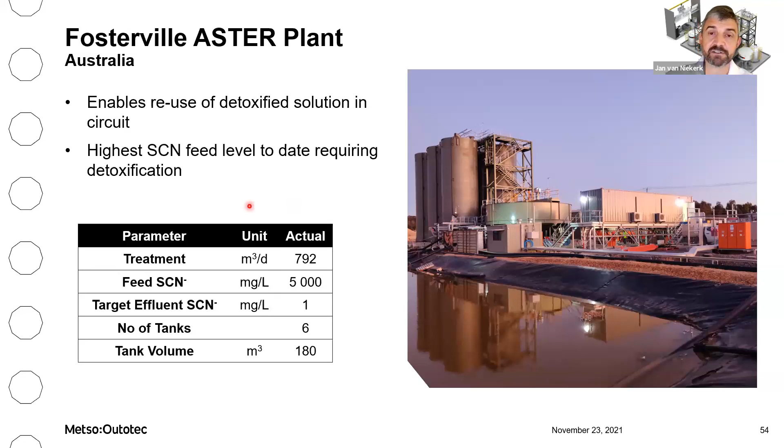This plant was commissioned earlier this year, so we're just still gathering the operating data, but so far it's operating very well.